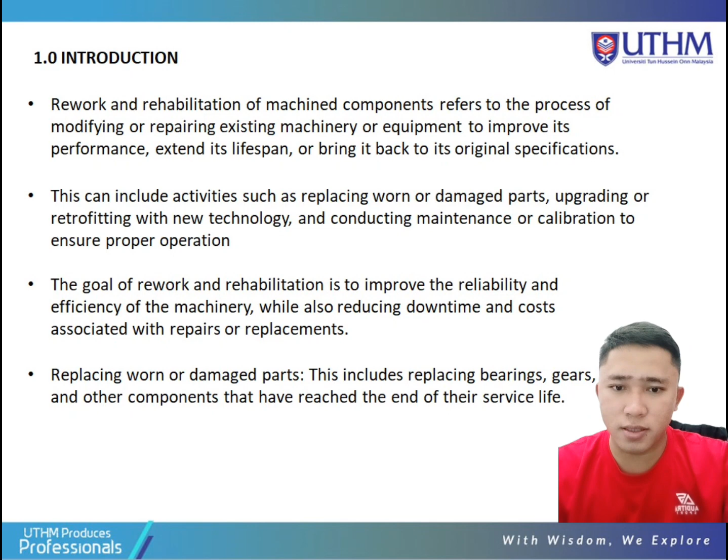Rework and rehabilitation of machine component can involve: number 1, upgrading or retrofitting with new technology; number 2, conducting maintenance and calibration; number 3, improving the design or layout of the machinery; number 4, conducting non-destructive testing (NDT) to check the integrity of the component; number 5, applying coating or surface treatment to protect the component from wear and corrosion; number 6, providing training to the operators and maintenance personnel to ensure safe and proper operation of the machinery.

The specific tasks involved in rework and rehabilitation will depend on the type of machinery and the specific issues that need to be addressed. Okay, that's all for me. I want to pass to our presenter to present the next article. Okay, thank you.

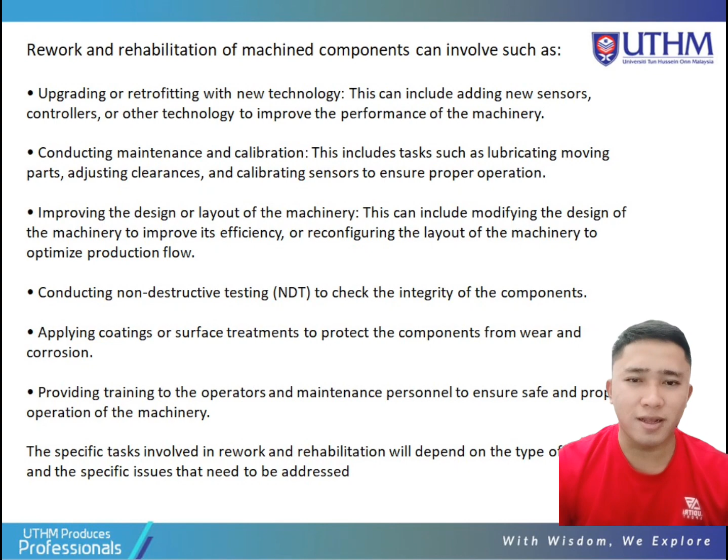Thank you to my friend. Now I will present about the theory related to surface finish, heat treatments and technology. Surface finish and heat treatments are used together to improve machine components in metallurgy. Surface finish refers to material surface texture and roughness, with smooth surfaces reducing friction and wear, and rough surfaces improving adhesion or grip. Heat treatments improve material properties such as strength and toughness by altering its microstructure.

Surface finishing and heat treatments use technology like mechanical finishing, chemical finishing, electroplating, and heat treatment methods like induction hardening, quenching, and tempering.

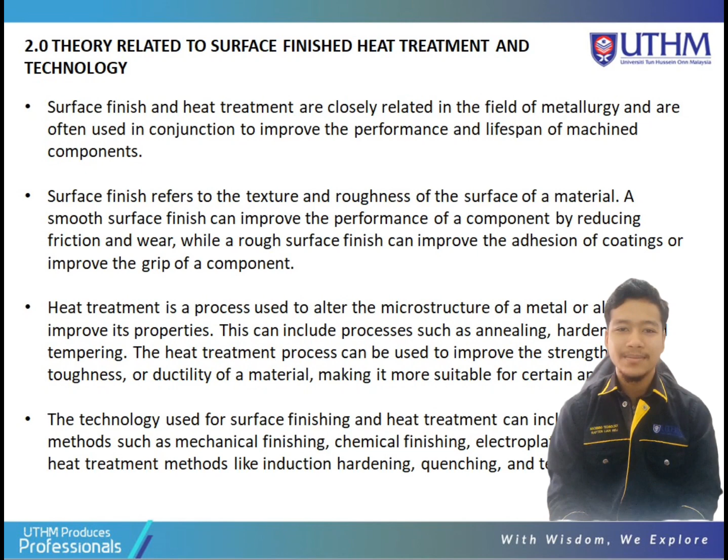The next is the measurements results that have been made in accordance with the project's drawing. Measurements show that the project was successfully produced and meets the specified requirements of being less than 0.5 mm in microns. Testing was done using a caliper, and the results show that the project provided satisfactory measurements. Below are the measurements and the product that we made.

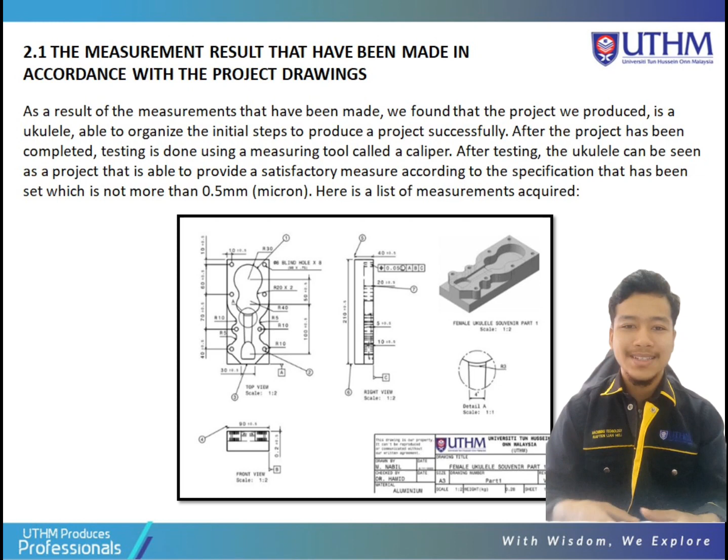Next I will explain about the table we are measuring by parts. Number one is drawing dimensions, radius 30 plus minus 0.5, and the part dimension we got is 59.9250. Tools used were flexible measuring machines, and the status of the part is okay.

Next is the blind hole, 8 blind holes, diameter 8 plus minus 0.5. The part dimension we got is 8.7542, and also we used flexible measuring machines, and the status is okay.

Next is 30 plus minus 0.5, part dimensions 29.5892 millimeters, and we used flexible measuring machines, and the status is okay.

Next is 90 plus minus 0.5, and part dimension 89.8130 millimeters, and tools used were flexible measuring machines.

The status is okay. And next, drawing dimensions 40 plus minus 0.5, and part dimension 40.1150 millimeters, and tools used were flexible measuring machines, and the status of the part is okay.

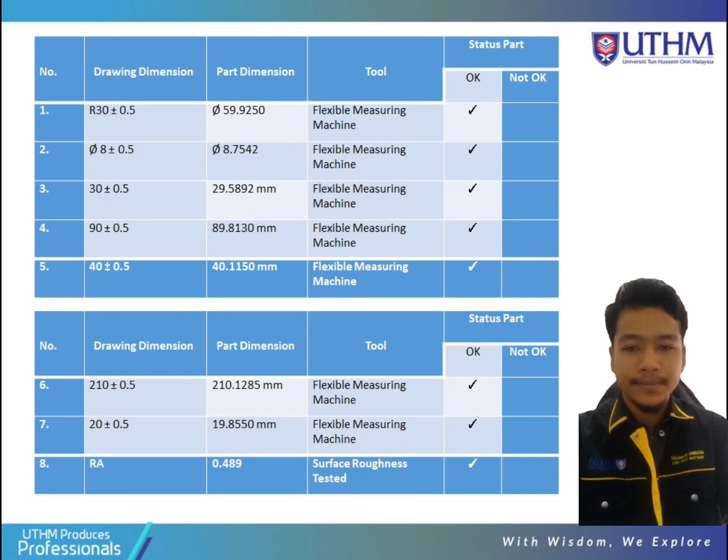Okay, thank you Nabil. So I will continue the next slide with 3.0, the appropriate type of surface treatment or heat treatment method. The appropriate type of surface treatment or heat treatment method depends on the desired outcome and the properties of the material being treated.

Some common surface treatments include sandblasting, polishing, and electroplating. Heat treatment methods include annealing, hardening, and tempering. It is best to consult a metallurgist or materials engineer to determine the best method for a specific application.

3.1 Processing system used in Project 1: A. Injection molding. In injection molding, a plastic or thermoplastic material is heated until it is in a fluid state. Then it is injected into a mold under high pressure. The material then cools and solidifies, taking the shape of the mold.

The mold is typically made of metal and can be composed of one or more parts. The process is used to create a wide range of products, from small medical components to large automotive parts. There are several types of injection molding, such as standard, thin wall, and micro molding, each with its own set of advantages and disadvantages. The choice of injection molding method depends on the product design, material properties, and product requirements.

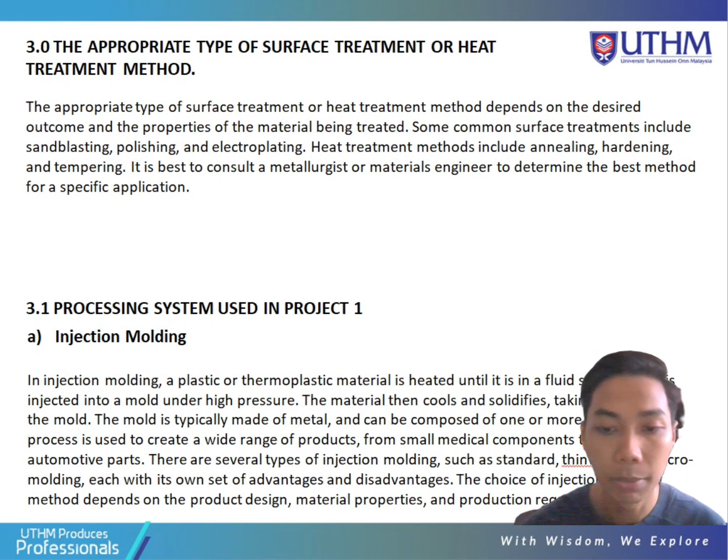Next, injection process. The injection molding process generally consists of the following steps. Number 1, clamping. The mold is clamped shut by the injection molding machine.

Second, injection. The plastic material in pellet or granular form is fed into the heating barrel of the machine, where it is heated until it becomes a fluid. The molten material is then injected into the mold under high pressure.

Third, cooling. The mold is cooled to allow the material to solidify and take the shape of the mold. Fourth, ejection. The finished part is ejected from the mold by the ejector pins. And lastly, trimming. Any excess material called flash is trimmed off the part.

The entire process is controlled and monitored by the machine's computer, which ensures that the process is consistent and repeatable. The cycle time, which is the time it takes to complete one injection molding cycle, depends on the part size, complexity, and material properties. Additionally, depending on the type of material used and product design, some specific steps may be added, such as pre-treatment of the material, post-treatment of the part, and quality control.

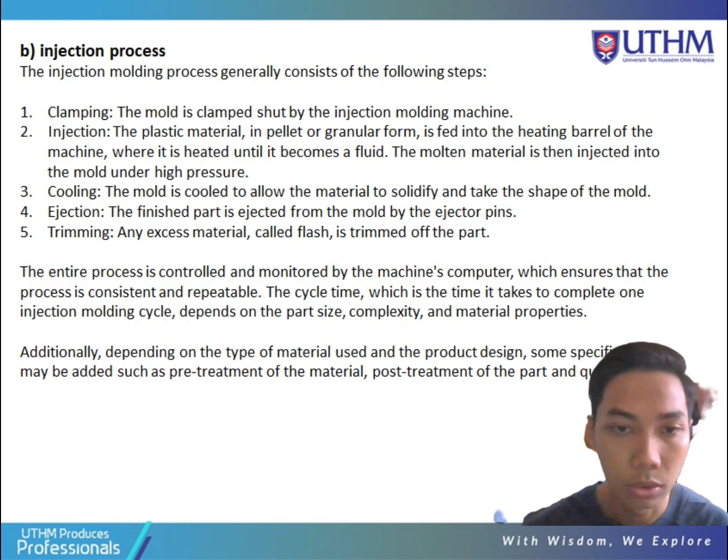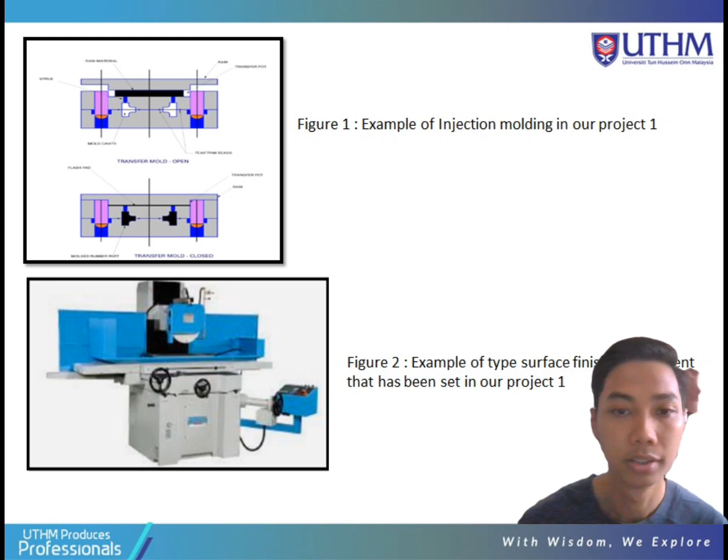Today, I would like to continue the presentation about justification for the type of surface finish treatment that has been set in our project.

The finishing process aims to change the surface of the produced part to achieve a specific objective. Commonly, desired objectives include improved aesthetic, adhesion, solderability, chemical, corrosion, fouling or wear resistance, hardness, electrical conductivity, defect removal, and surface friction control. In limited cases, this technique can be used to restore original dimensions or to salvage or repair parts.

There are two main categories of finishing process, and they largely depend on how they affect the workpiece. This process either removes or reshapes the finish, or changes the finish. The removal/reshape process works primarily to alter the surface of a part to achieve a desired finish by removing or reshaping the part. In this project, for the surface finish process, we use a grinding type treatment.

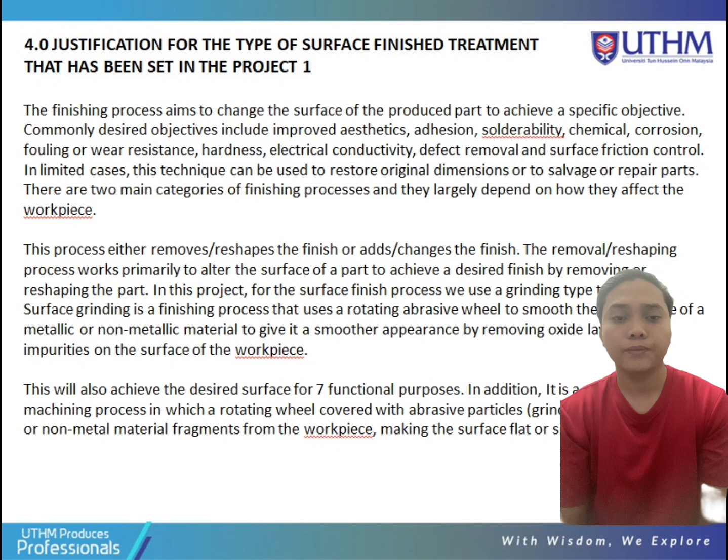Next, I will present about project improvement. There are several ways to improve an injection molding project, such as proper part design. A well-designed part can reduce the number of mold cavities, improve part functionality, and reduce the overall cost of the project.

Second, material selection. Choosing the right type of material for the application can improve the properties of the final product, reduce the cost, and increase the efficiency of the molding process.

Third, process optimization. Optimizing the process parameters such as injection speed, pressure, and cooling time can improve the quality of the parts and reduce the cycle time.

Fourth, maintenance. Regularly maintaining the mold and the injection molding machine can reduce downtime, improve the lifespan of the equipment, and ensure consistent quality. Fifth, quality control.

Implementing a comprehensive quality control program can help identify and correct any issues that may arise during the production process. Sixth, automation. Automating certain aspects of the process can increase efficiency and reduce the need for manual labor.

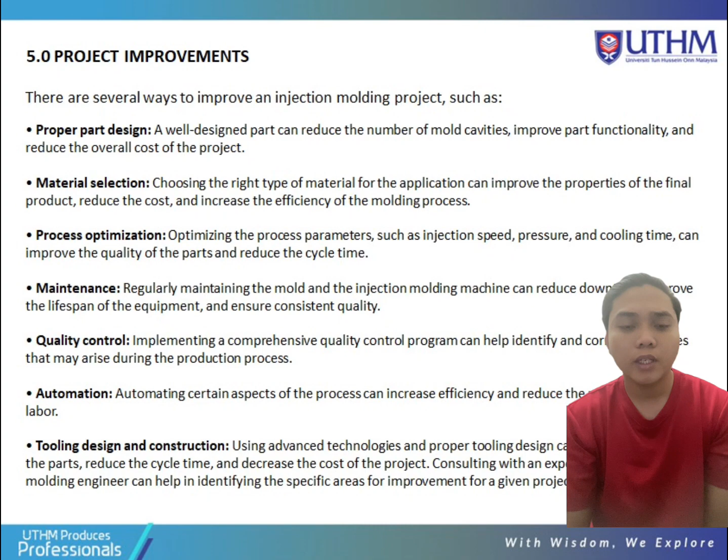The last slide for our project is the summary. Overall, the project was completed successfully.

We also did some work after the completion of this project, including testing the roughness on the surface of this project. In addition, we cleaned the machine after it was used. In the meantime, we also followed the safety SOP before and after doing machining work in the industrial machining workshop.

Next, we also tested this project in terms of the top cover on our project. We found that it worked well.

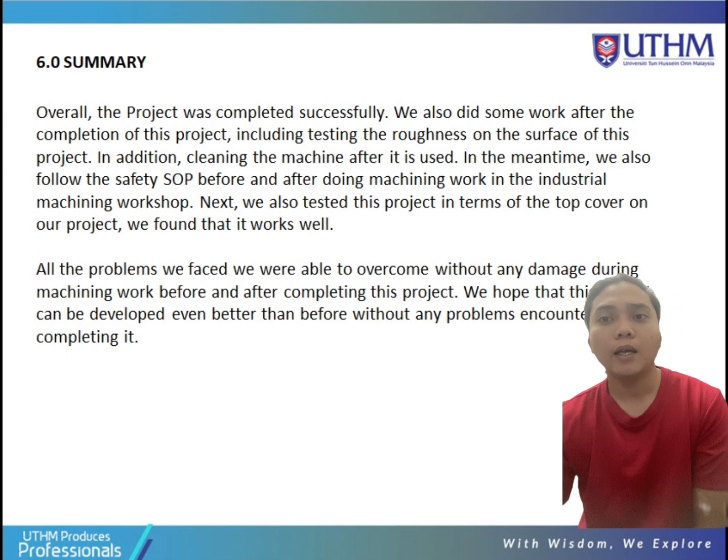All the problems we faced, we were able to overcome without any damage during machining work, before and after completing this project. We hope that this project can be developed even better than before, without any problem encountered after completing it. Thank you.